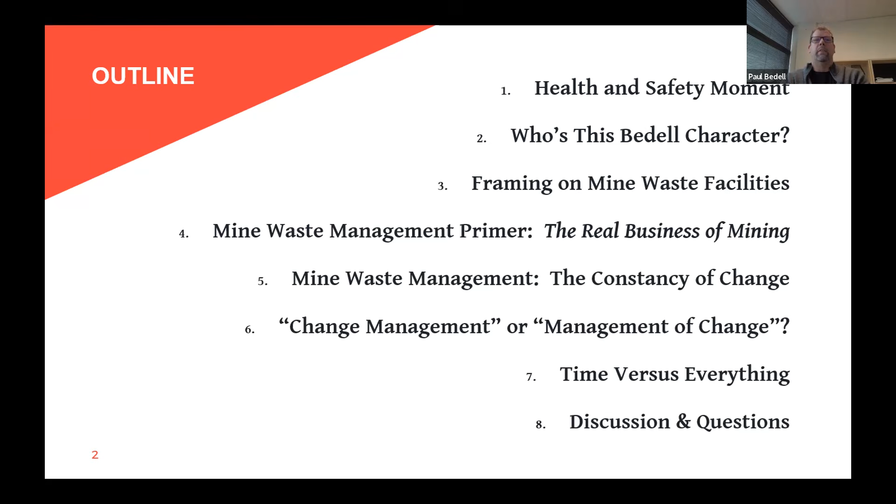So my health and safety moment, I'm sure a lot of you have seen this failure or heard of it. It was the proverbial straw that broke the camel's back in the mining industry in 2019 when the second failure of a major dam occurred at Brumadinho. It was in January of 2019. We've just passed the 4-year anniversary of that. It resulted in upwards of 252 deaths. So if this works, what I want to do is share with you the video that was captured of the dam failing.

What you'll see here is static liquefaction of the structure in the background. And there are people on the dam. There's a major cafeteria downstream of the dam that these people are killed instantly on. The dam toe, as it's blowing out here, is moving in excess of 200 kilometers an hour. This is an instantaneous failure.

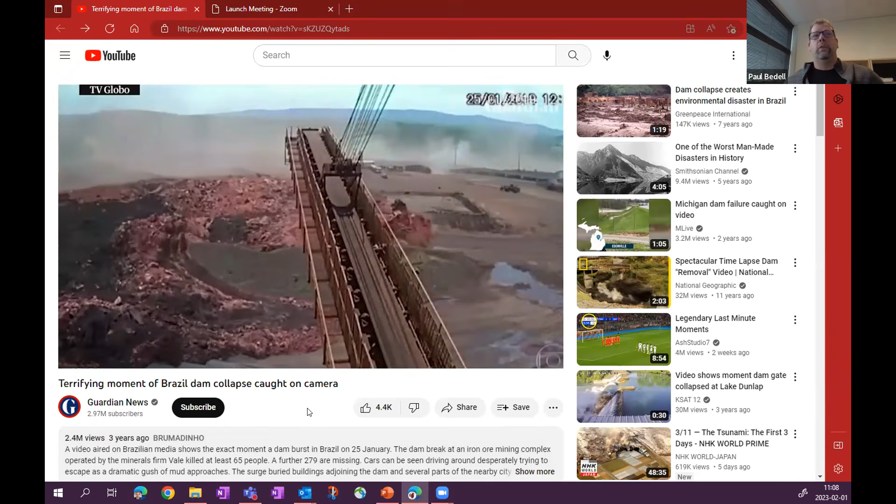This is the flow of the tailings much further downstream on the mine site, moving at about 60 to 70 kilometers an hour at this point. Think of toothpaste coming at you with this. You can see the equipment moving about, trying to get out of the way. A few of these operators were saved in that their vehicles were actually lifted and floated on these flows. But again, unfortunately, many people lost their lives. Far too many people lost their lives.

So coming out of this was the development of the global standard for tailings management, which heavily influences our practice today, captures a lot of good practices, and sets the bar, frankly, for what the industry needs to deliver from a societal perspective.

So why me? Like I said, I've spent my whole career, coming up on almost 30 years, in mine waste management. Started with Golder and then migrated to WSP. I've done everything from design to resident engineering, which is implementing and interpreting designs into construction. Permitting, operational support, working with the operators as to how these facilities are operated and developed over time,

and then engineer of record services. The engineer of record is the individual who is accountable for auditing and confirming that the owner provides a safe facility, and also providing time-bound recommendations if corrections need to be effected by the owner. And as per the introduction, I've been very fortunate to work all over the world. I've worked with many gifted professionals who have guided my career. Those are some of the baseball bats that I've grown up at the business end of.

How do we frame a mine waste facility, especially for people who aren't familiar with these facilities? They are some of the largest engineering structures on Earth, which is a real blessing in terms of experience. Very few engineers actually get to see fully implemented and operated, let alone closed, designs. Think about a bridge engineer. How many big bridges actually come to fruition that you can see over the course of your career? These facilities are happening all the time, and extend out lifetimes of tens of decades at times.

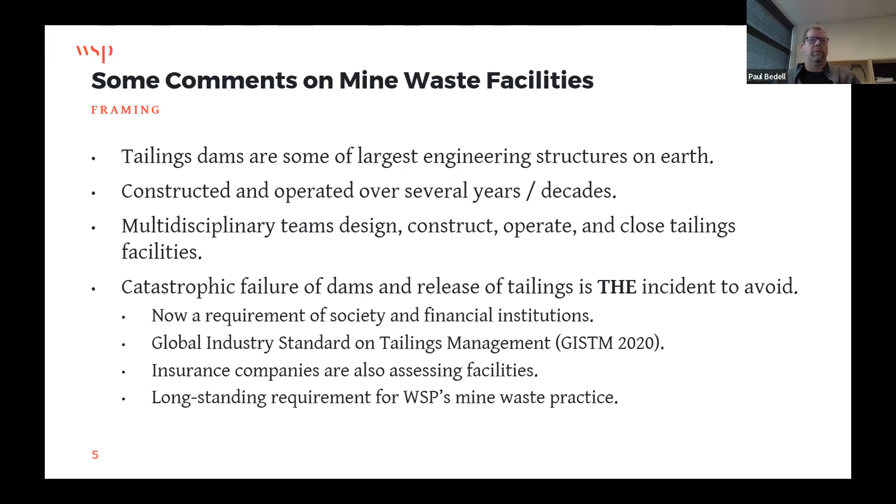So we now have the global standard on tailings management, and that is the fundamental requirement for the mining industry now. Insurance companies are now entering into the discussions of how these facilities are insured, what they need to understand, what they need to have in place as well. And the avoidance of catastrophic failure of dams as they work towards designing, figuring out your design loads, and also the operational requirements. Those are long-standing requirements for Golder's and now WSP's mine waste practice. So again, the global standard serves to strengthen what we had for a number of years, and now it's a non-negotiable.

With regards to mine waste facilities, with all that said, there's a large risk profile that's ever changing and that ever needs to be managed, mitigated, and addressed. So some words of wisdom that I've glommed onto over the years.

Fundamentally, tailings facilities typically have a very high consequence, namely catastrophic failure leads to loss of life or significantly unacceptable environmental impacts. And you want to have those managed with low likelihood of occurrence. From Mount Polley, I'm borrowing heavily from that report here, tailings dams are complex systems that have evolved over the years. They are also unforgiving systems in terms of the number of things that have to go right.

Their reliability depends on consistent, flawless execution in planning, subsurface investigation and analysis and design, in construction quality, in operational diligence, in monitoring, in regulatory action, and risk management at every level. All of these activities are subject to human error. That's a key thing to pay attention to. Unfortunately, people are flawed by definition, and people have to be involved in these.

I particularly like Mike Davies' words back from 2002, his axiom that tailings dam failures are a result of design, construction, or operational management flaws. They are not acts of God. They just don't happen out of the blue.

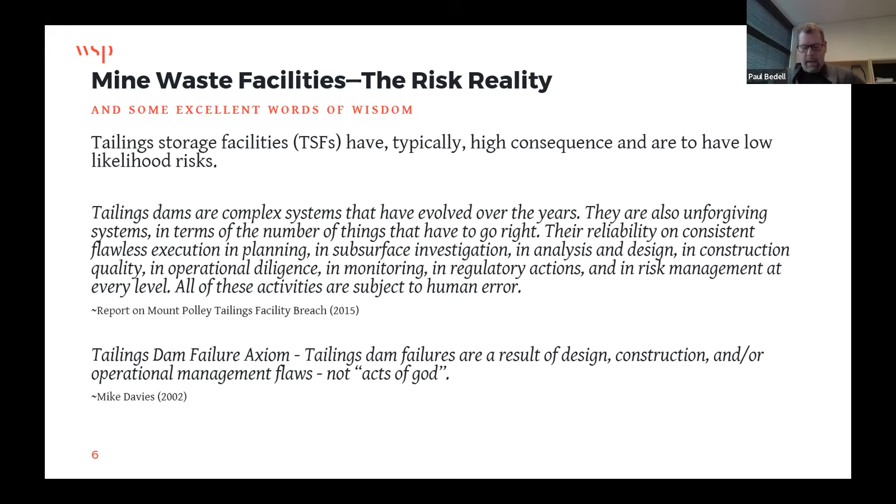So it's a daunting opportunity to get involved with these types of facilities, but highly rewarding. I can speak to that. I get up juiced every day to do what I do.

Some of the things that you'll learn moving through mine waste facilities is that, like I said, you've got different ways of looking at it, different types of disciplines and whatnot. Some of the things that drive me nuts: operators, those who are turning on and off spigots, who are trying to raise the dam. Operators typically like to take the approach that everything needs to be easy.

And while that's true, you need to bring into consideration that this work has to be executable in the field and feasible. There are things that are non-negotiable from a design, operation, and risk management perspective, and it's making sure that that is communicated clearly, explained, and understood by everybody.

In fairness, as a pit is mined, for example, and we use those tailings that are sourced from the pit after processing, they rely on a model, but it's not until full operations get going, they move into the next phase, that we can actually more fully understand and characterize the ore body and its behavior, which influences the behavior of the tailings. So again, we need to make those connections very strong right up front and understand what drivers we have and what we can control.

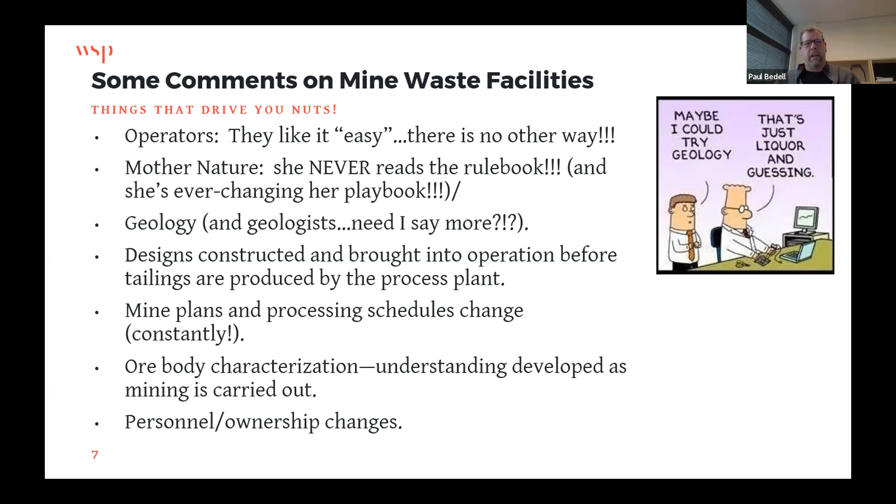But again, understanding that careers come and go, they start and end. How do you transition and bridge that gap of capturing the information, documenting it, and make sure it moves forward? That's a key challenge for any operation.

So risk. I'm a big proponent of trying to steer a conversation away from risk, as risk is the outcome of a calculation, typically likelihood versus consequence. If you can talk about likelihood and consequence of a given hazard, then you can understand what you control, likelihood or consequence. And do those numbers change over time?

That's a key one. I use this explanation when I try to explain to my mother that I'm safe when I'm either mountain biking or rock climbing. I try to reduce the likelihood of falling by getting better, but I limit my consequence. I stay on easy stuff where I'm very unlikely to fall. Also, I use all my safety gear and I climb with people who literally I trust my life with on that.

A couple of reading recommendations. These are critical in my opinion. One is by Dr. Morgenstern in 2018, the 6th Victor de Mello lecture. I borrowed a lot from that in my thinking. This really codifies a lot of lessons that I'd learned over the years and helped put it into context even for me.

It's an excellent paper, well worth studying and revisiting, frankly, a number of times, as is Peck's classic Rankine lecture paper on the advantages and disadvantages of the observational method. That's a must read for any geotech. And again, you keep coming back to it. Each time you read it, you'll get something new from it.

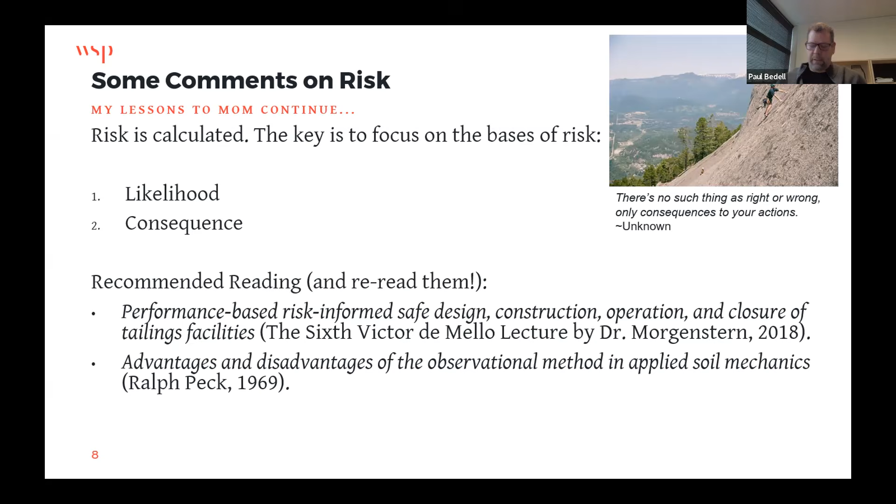So there's an unacceptable consequence to these failures. They've been happening far too frequently for far too long. Again, that's where the global standard has really inserted itself and is a watershed moment in the mining industry for this, with the objective for zero harm to people and zero harm to the environment.

A recommendation that I would make: a good colleague of mine, Terry Eldridge, in 2019 at Vancouver's Tailings and Mine Waste, gave a keynote address called Lessons Yet to Be Learned. It's on YouTube. Make yourself a coffee, sit down for 40 minutes, and then watch it. And I guarantee you're going to want to watch it again.

In that talk, Terry makes the point very clearly that we've known for far too long technically how to avoid such failures as these. We actually need to implement what we understand so that this doesn't happen.

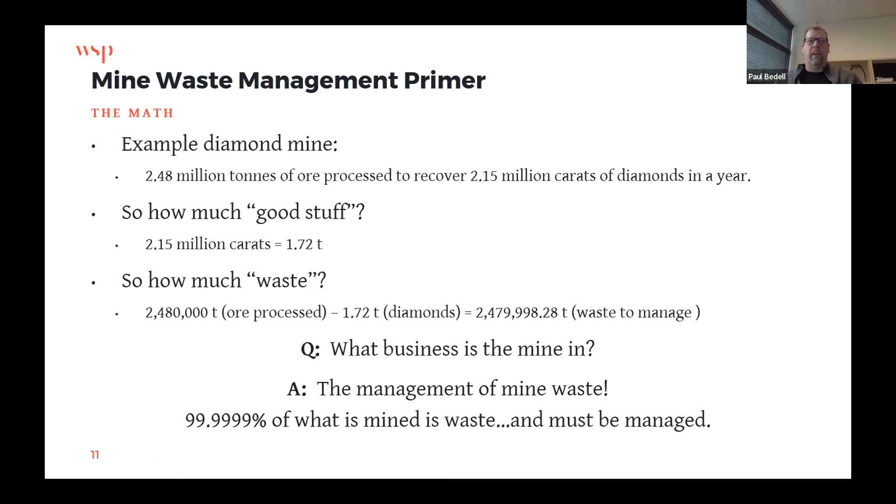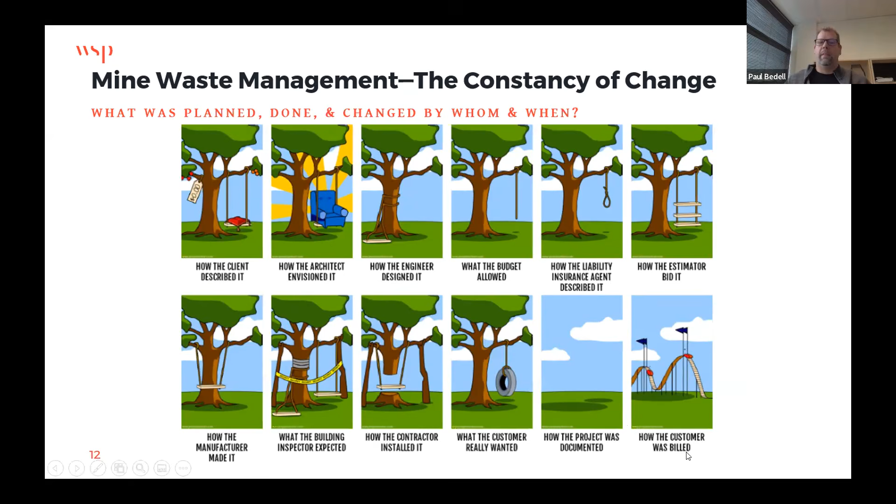So the constancy of change. This was a facility that I worked on a number of years ago. We were working on a diamond mine. The terminology for their waste is processed kimberlite. So the design and the plan initially with the mine was that half of the waste would be placed back underground as backfill. What was placed on surface would be paste as well, so they wouldn't have to split the streams. So 50% underground, 50% to surface.

The design exploited that we could progressively close as the facility was advancing, and that's critical, rather than run the facility through the end of mine life, in this case 40 years, and then start to close. If you can get progressive closure in real time, it does a couple of things for you. First of all, if you can start closing a facility in the first year or two of a 40-year operation, then you've got 38 years worth of experience on the first piece that you've closed, rather than run it through to 40 years, then start closing, and then hope for the best. You can learn from that.

In some jurisdictions, closure bonding, you have to pay up front until you start closing the facility. The idea there is that the mining company can't disappear and then the government is left holding the bag to pay for closure. So they bond it up front. If you can progressively close and demonstrate closure, there are mechanisms whereby you can get that bonding back earlier. That's the financial carrot for the mine to do this.

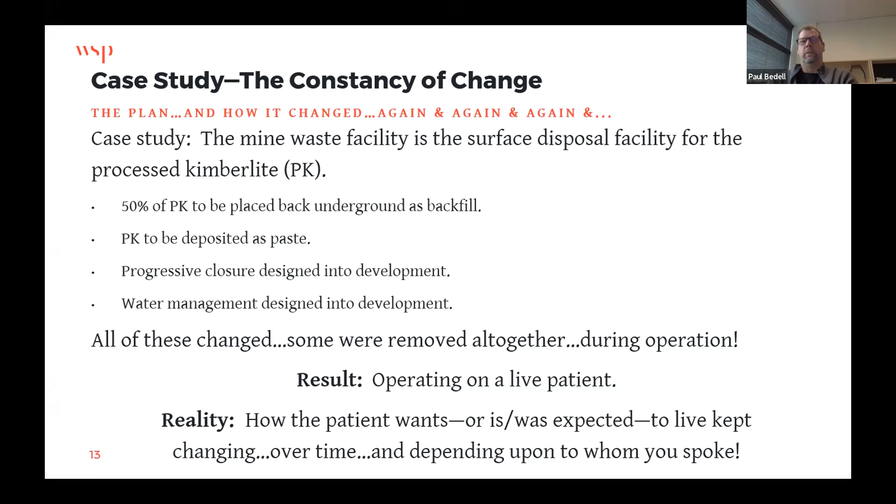So it's what does the patient want, or what is the patient expected to do, and also to be kept alive at the same time. And that also depended upon who you spoke to, be it the mine team, the processing team, the guys doing the mine waste facility. All of them had a different perspective on things. So it was an interesting challenge, to say the least.

So I've got a quotation here that I stumbled across a few years ago, and I thought it was quite good, as it touches on a number of points that I've just been speaking about. So I've got a couple of slides that I'll read to you here. So there are two approaches to a natural problem. They are the approach of the pure scientist and that of the engineer. And again, as a reminder, engineers apply science. We're not scientists. We're trained in science, but we apply science as engineers.

So the pure scientist is interested in only the truth. For them, there is only one answer, the right one, no matter how long it takes to get it. For the engineer, on the other hand, there are many possible answers, all of which are compromises between truth and time. For the engineer must have an answer now. Their answer must be sufficient for a given purpose, even if not true. For this reason, an engineer must make assumptions, assumptions which they know not to be strictly correct, but which will enable them to arrive at an answer which is sufficiently true for the immediate purpose.

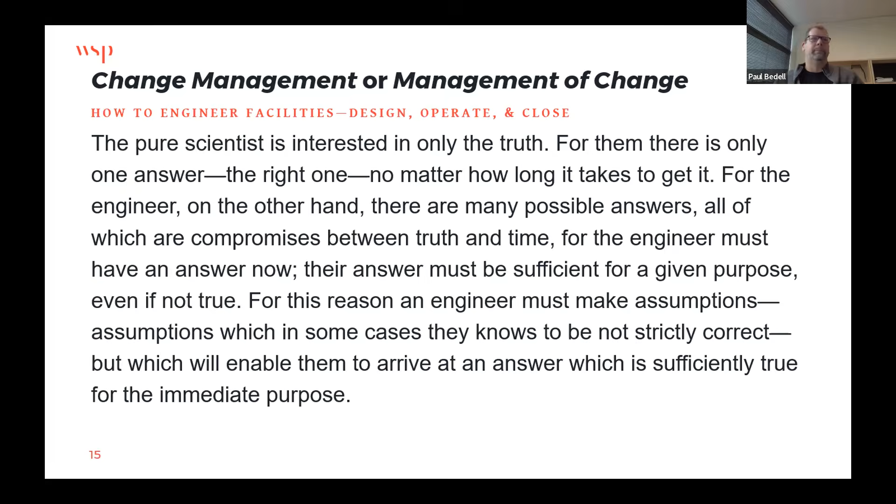Mistakes are not made when an engineer makes their assumptions. Mistakes are made when other engineers forget the assumptions which have been made, and assumptions on which a theory is based are too easily forgotten. This was from Hugh Golder back in 1948 in a paper that I cited the reference there. So that speaks to the importance of documentation, communication, and also revisiting the design assumptions versus validation during operation. The fit for purpose at a given time.

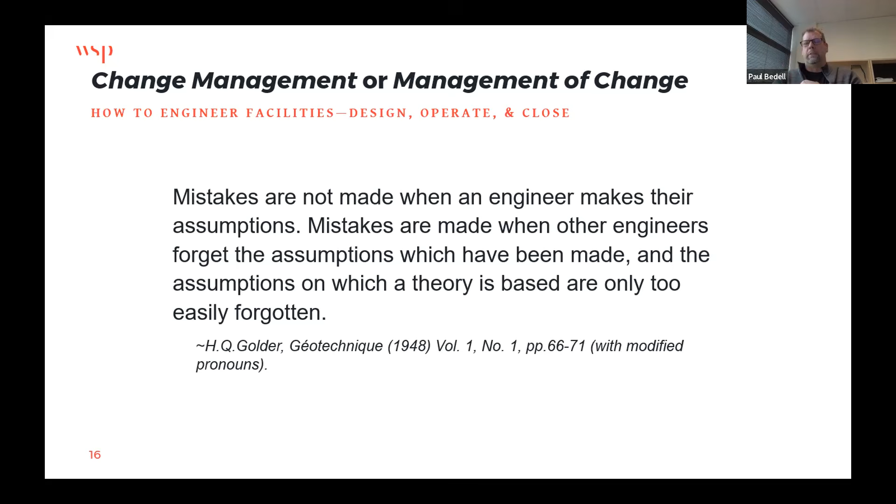If the design objective or if the major influences for a facility change over time, you need to go back and understand what that means. If you think back to the dam that we watched fail in the health and safety slide, several elements of the design changed over time. And the question would be, were they mindfully done in consideration of what was built before, how it was operated, future operations? So this is super critical. There's some really good guidance and reminders in this piece from Golder.

The engineers, on the other hand, look at the longer time of exposure we have to something, the likelihood of failure goes up. There will be a larger rain event. There will be a larger earthquake, as examples, that hit. So how do we balance these two things? There's a bit of a sweet spot in here in that you don't want to spend all your money up front if you can rationalize why pushing it off to some point makes a little bit more sense.

And we can look at how can we, first of all, identify the band, and then is there a way to narrow that up in the design and construction so that we can become more resilient with that. Also, the cost of money isn't a single line. There's also a band in there too that's termed coping cost. So it's a bit of a paradigm shift to start having these conversations.

You'll see if you look at the Mining Association of Canada's climate guide that came out a couple of years ago, this style of diagram is in there. That was something that I pushed pretty hard for to try to get in when we were pulling that together with MAC. So it has gained some traction in this thinking, rather than the typical historic practice of pointing to a specific storm and then trying to meet or exceed that in the design.

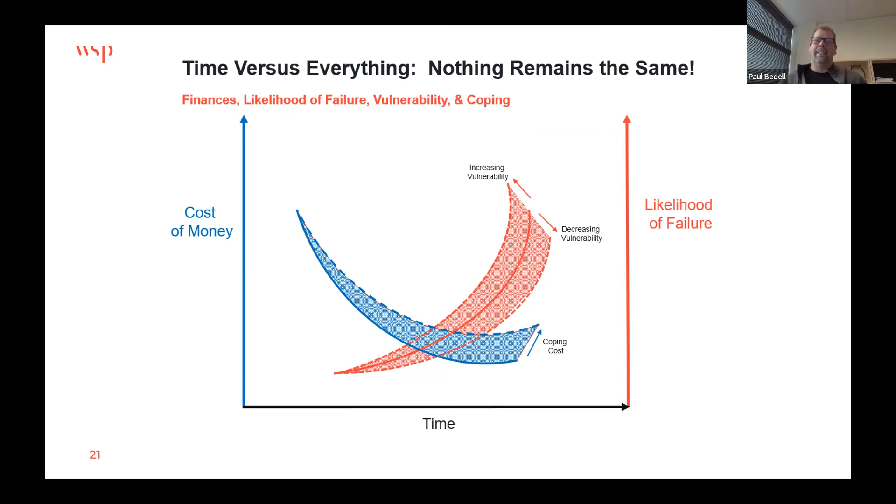So some of the things that we want to just capture and start thinking forward: closure is obviously a huge component to a tailings facility. As I said before, progressive closure is something that I think we've got a long way to go on. We always talk about designing for closure. I think that's gained some traction, certainly over the course of my career. That's much better defined, much better executed. I think the next paradigm shift will be operating to closure.

How do we actually get the operators to understand that the closure plan is something that they need to try to operate to, rather than the past and historical way of looking at things that, well, we'll just close it when we're done. You can do some things during operation; there's synergies to be gained there. Permitting and closure are intimately linked in just about every jurisdiction that I've worked in. So again, that is a big carrot that has to be hit now for the mining companies. And like I said, operations is, I think, the missing link right now.

Design modifications, as I said, change all the time. Capital expenditure and operating expenditure certainly come into this. The code word for that is when a client says we want to optimize the design. Optimize just means they want to get the price down. And again, you can work with the client on that, but there are some elements in a design that are non-negotiable. Those need to be made very clear to the client with the risks if they're not achieved, and certainly what the risks are likely to be if they don't listen to you as an engineer. Again, that's a lot of conversations that need to be captured and understood.

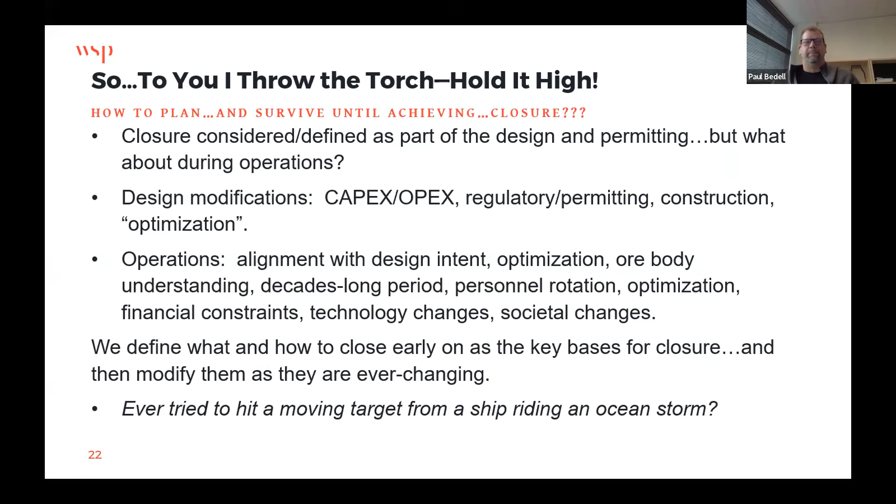So that's what I've been able to put together to try to summarize some of the things that you may not think of, especially those of you who are finishing up at school, where typically the assignment is relatively well defined by your profs. You've got your question, you know how to run the engineering, and you get the answer. Things change in the real world where all of those pieces change along the way, and you're trying to navigate that with your clients, with your teams, and with yourself. So lots of food for thought.